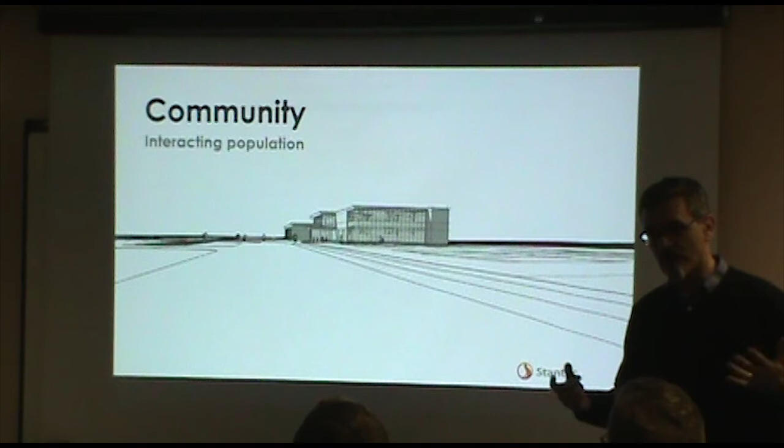This is a preview of what we're proposing to share with the community at a larger open house session, so we definitely want your feedback and input. The dictionary defines community as an interacting population of various kinds of people with a common purpose in a common place. Looking at that definition, it kept coming back to what we kept hearing from all the input, from the surveys, from the committees, from everything we researched about what this really needs to be about. So with that, I'm going to walk you through the conceptual design for a proposed new Berkley Community Center.

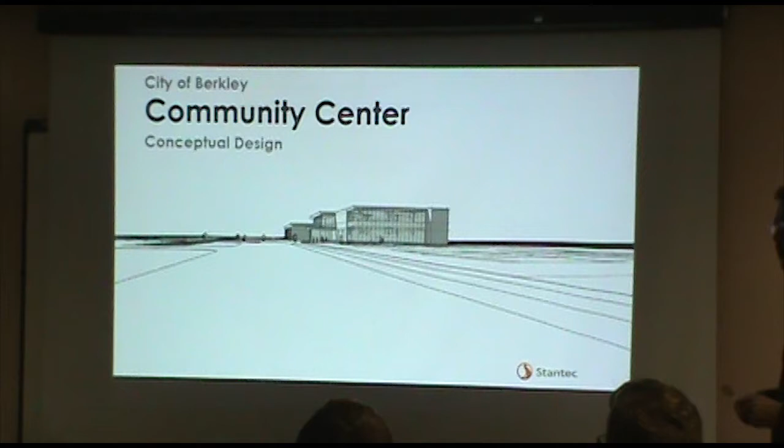If you think you're going to see the cool new pictures right up front, you're going to have to wait a minute for that. We're going to walk through a basic agenda talking about the conversations and research that got us to where we are, the vision for what this space could be, and then end with the components of what we're proposing it will make up.

Starting with Parks and Rec, kind of where they are today—a lot of you know this information. I'm not going to read from the slides, but we wanted to give you a picture of what we currently do in our facility. We think it's good, we think it's not great—we have some facility limitations.

One of the things we saw as we were going through here, looking at pictures and at what we do, is how many things we can do for youth, but how limited we are to do things for teenagers, adults, and even seniors. Currently there's a list of a lot of the classes we offer, and one of the things we hear all the time when people come in is, 'Oh, I didn't know you do all of this,' and 'I didn't know you could do this.'

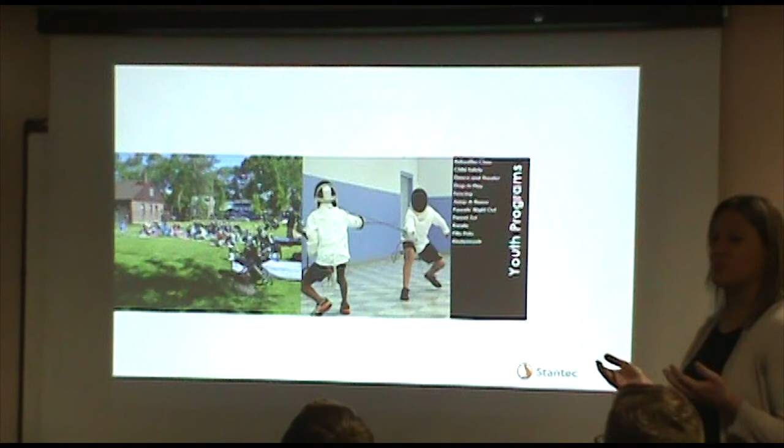We have nearly 12 special events throughout the year. We run with 5 full-time staff, and we do over 30 youth programs, a number of senior events, programs, lunches, outings. We had a group of 20 seniors just go see A Christmas Carol yesterday. We run a transportation program. We run specialty camps. This year we had over 350 different kids come through our summer day camp—349 actually, but 350 sounds like a better number. We maxed out at about 180 on some days, and averaged 165 on others. But the place they were located was the ice arena, and we're limited with what we're able to do there.

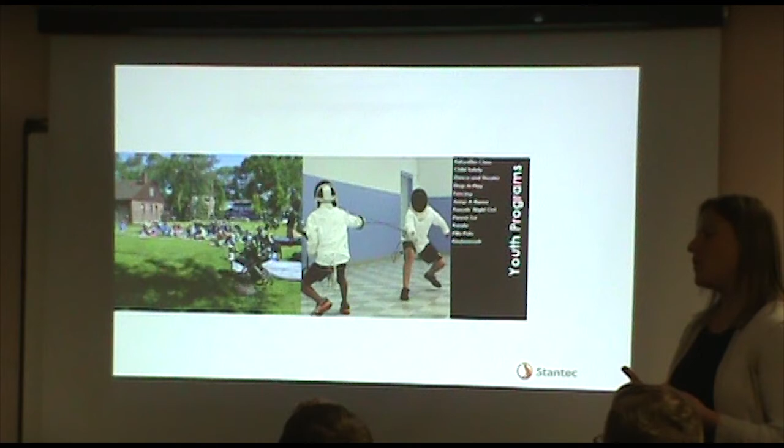We're limited with what we can do in terms of ages because of the facility. But our facility is used, opened, and operated over 300 days throughout the year. It's used during the day, and we have multiple birthday parties on the weekend and evenings. I can't stress enough how good I think our staff does with what we have. We just feel that it can be great, and that now is the time to do that.

I remember the first time I got a chance to meet the entire staff of Parks and Rec, and I kept waiting for the rest of the staff to come in, especially with the list of everything they've been doing. So to have this group be able to do that, it's pretty amazing.

So we did research on really what's driving this need. For those of you who saw the earlier report delivered to the CAC several months ago, that contained a lot of this information.

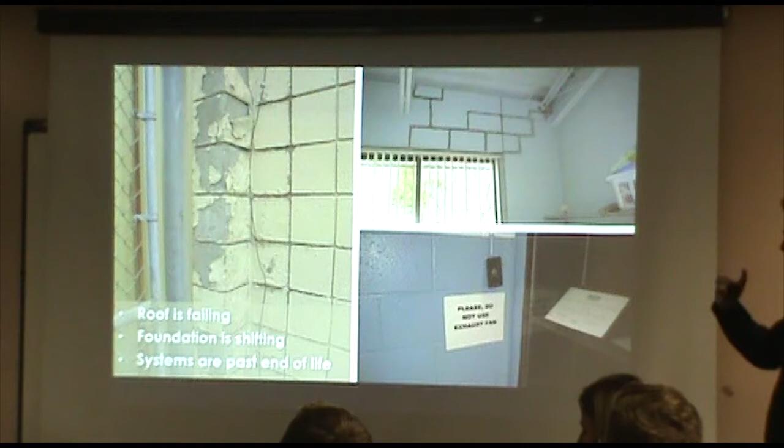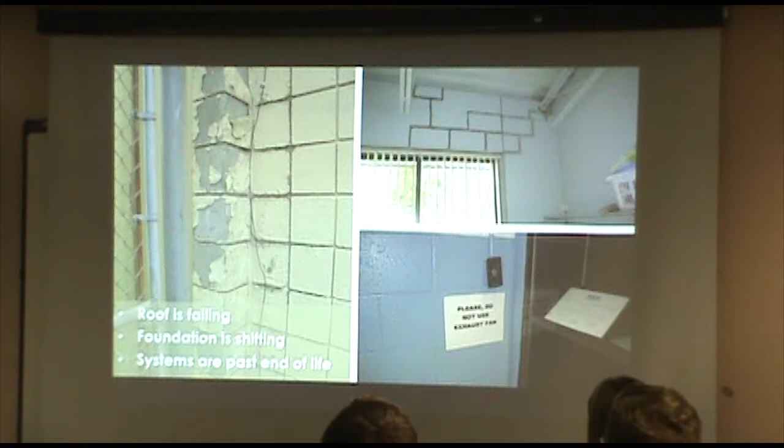The first piece is really these buildings have been used, and they are at the end of a lot of their components—a lot of the pieces are at the end of their useful service life. There are some challenges beyond that. The roof system on both parts of the building is at the end of its life, in some cases past. There's foundation shifting causing the community center building to actually sink and move—things that are not easily repaired. And the heating, cooling, ventilation, lighting—all of these things, depending on which building you're in, date from the early 1970s all the way up through the late 1970s. Coming from that same rough era myself, things start to wear out when they get over 45 years old.

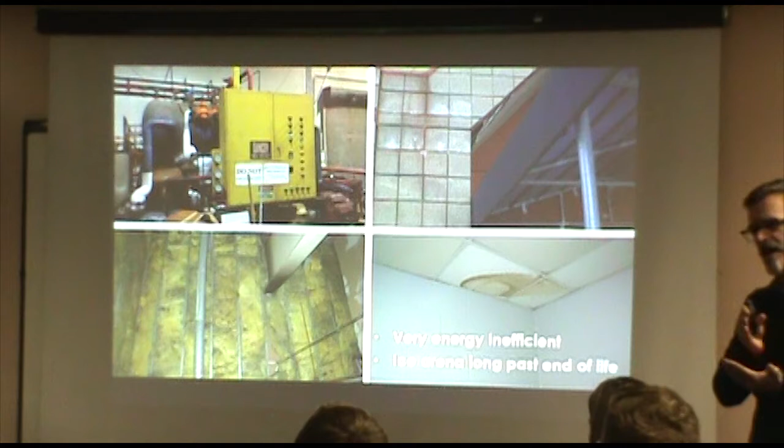The buildings are not very energy efficient, and the ice arena is long past the end of its life. For an ice arena of that type and era, it ran a lot longer than one would be able to expect.

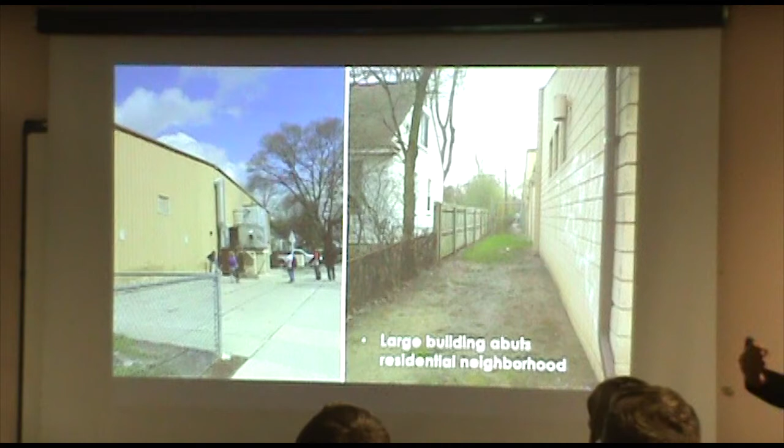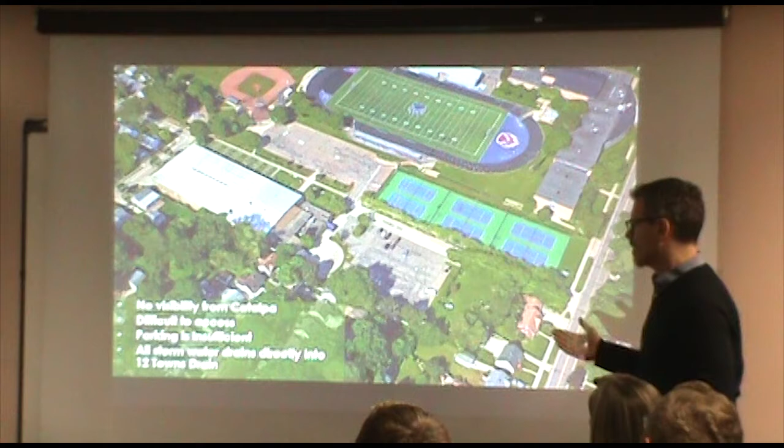Some of the other challenges we see are—it's a very large building and it immediately abuts a residential neighborhood with nary 10 feet between the two. So it really doesn't present a good front for what's going on when it backs up to a bunch of houses like that. When you look at the overall view, there's no visibility of the community center at all from Catalpa. It's difficult to access, and parking is insufficient, especially if there's activities going on and people are driving through and crossing drive lanes.

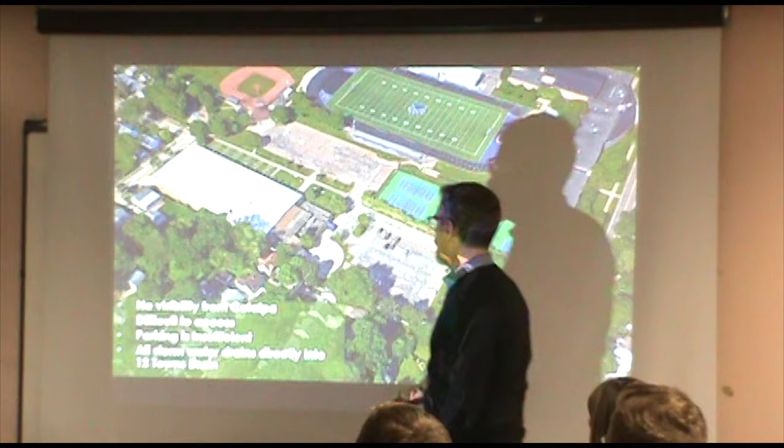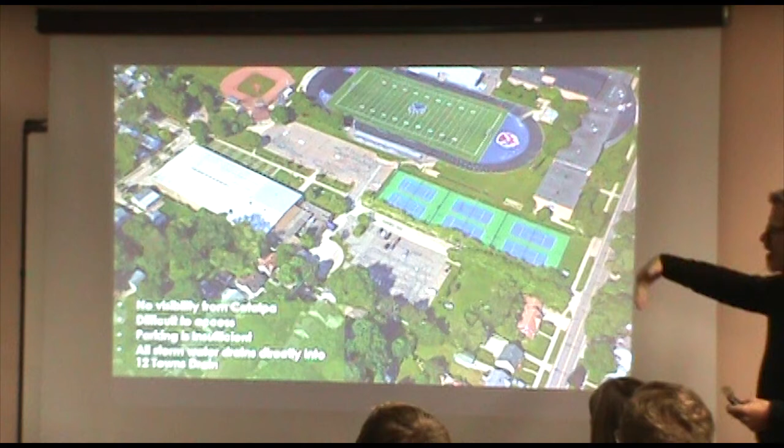The way it was originally designed—for those who don't know—the 12 Towns drain, a 7-foot diameter storm drain, runs right down Robina and hooks up to another one that goes down Oxford. It's about 20 feet down, which makes it very difficult to work with the site because you can't build on top of it. But all the parking lots drain without any detention directly into that, creating an issue with a lot of impervious surface draining directly into the 12 Towns drain every time there's a good rainstorm.

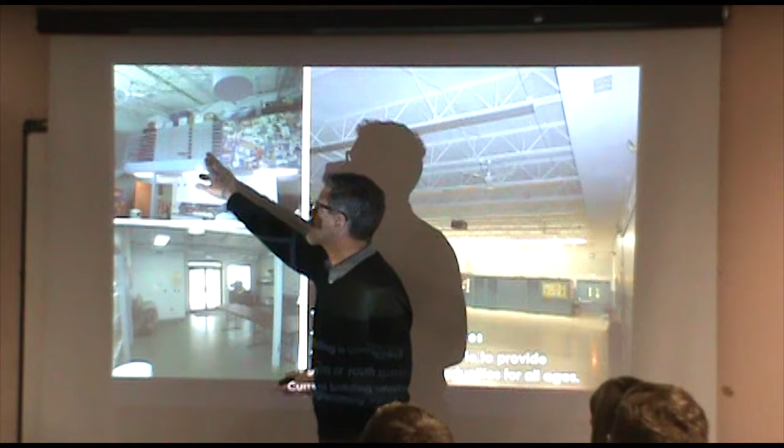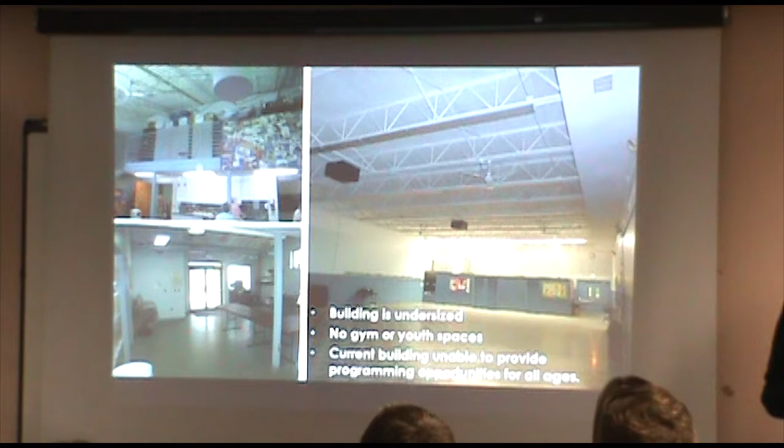When we get into the building—and this isn't even looking at the ice arena—the building is undersized. You can tell by the challenges of storage for everything being kept in there, furniture being stored out in the middle of active use space. The gymnasium, such as it is, is actually too low to be used as a gym, and too small, which really leads to the issue: the current building is unable to provide programming opportunities for all ages. It works well for some, but not really across the spectrum.

And as part of this, there was outreach in many levels over many years. I actually turn that back over to you. So we'll talk a little bit about these.

Obviously, the Recreation Advisory Board has been talking about a new community center and the needs of a new community center for over a decade. They started working on it probably early 2000s. Then it came to a vote in 2009, which we'll discuss, and moved to now.

The Citizens Advisory Committee studied all of the issues. They walked through the facilities, and their recommendation was that the community needed a new community center, void of a pool and an arena, but a new, up-to-date, energy-efficient center with 2 gyms. They looked at the survey, listened to the information, and looked at what other communities are doing as well.

We asked people what they wanted to see in the community survey, and that all went into designing what Stantec has designed at this point.

Research of similar facilities: between staff and I, we've been in over 15 different community centers in Michigan. I've been in 12 over the past 2 years, talking to people. We've talked on the phone about what works, about the best ways to make revenue, because that's something we have to think about, and what really makes sense and what facilities really will be used and have a right-sized facility.

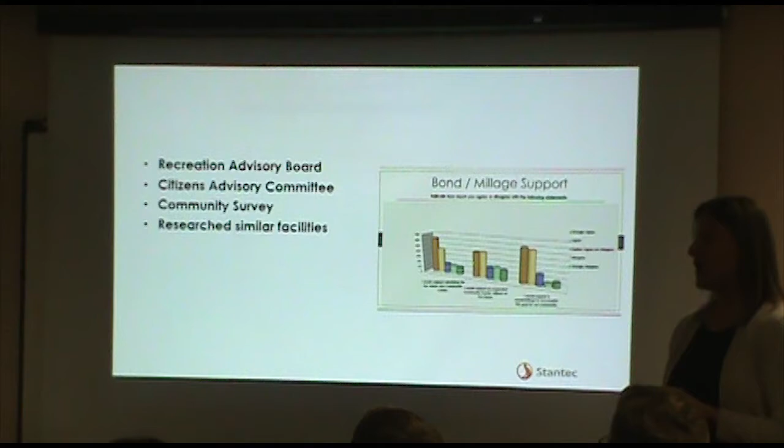When you're looking at some of these bigger communities, we don't need something the size of Canton or Livonia, but we've run the gamut on the community centers we've talked to. And then obviously our 5-year plan.

I'll repeat a story I've said often: during our 5-year plan, we had multiple community meetings and people came to tell us what they want to see in their community. I remember a gentleman sitting at a table who said, well, I don't want to say what I really think about your center because I like you guys, and his children do things in our building. And I said, no, please tell me.

And he said, well, I feel like when I walk in this community center, it feels like The Walking Dead.

The truth of the matter is that he wasn't saying we don't do a good job. This isn't our home, but in a way it is—it's our home away from home, and we love what we do and the people we service. But everything that came from the master plan and the conversations about the community center was, we'd like to see a gym, we'd like to see these different elements that we just don't have now.

So I think we really used all of these different outreach and research efforts to come up with a good plan. We also have daily conversations—all of our staff has daily conversations with people who use our community center now. Those are people who already use what we have and can tell us what they'd like to see in a new center. I think that's really important too, and we've been doing that for years.

So from all that research, from that input, from just spending time over the years in the facility, one of the things we were tasked to do was help define a vision for this project—not a vision for Parks and Rec, but a vision for a new community center, a new space for the community. It came down to a handful of what we call success factors, things that complete the sentence: for this project to be considered a success, it must. The things that really have to happen, both

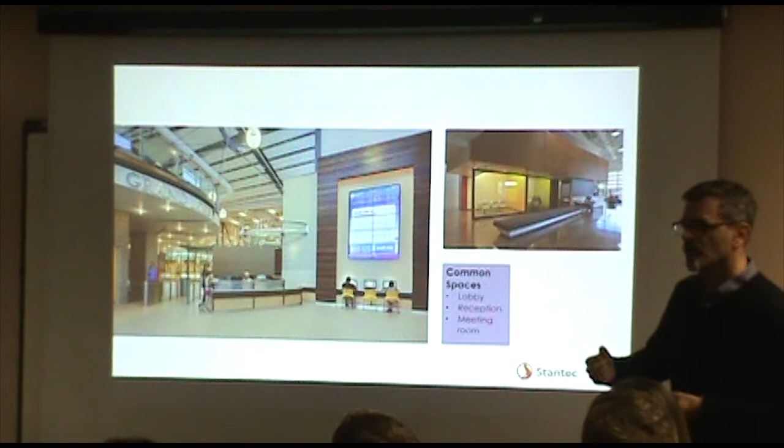But again, the idea that a welcome desk, a reception desk, is easily visible the minute you arrive, you've got a sense of welcome, but also has the ability for when a teen program's going on at the same time as a preschool or after-school program, that you can keep an eye on what's going on as those two groups are in the building at the same time.

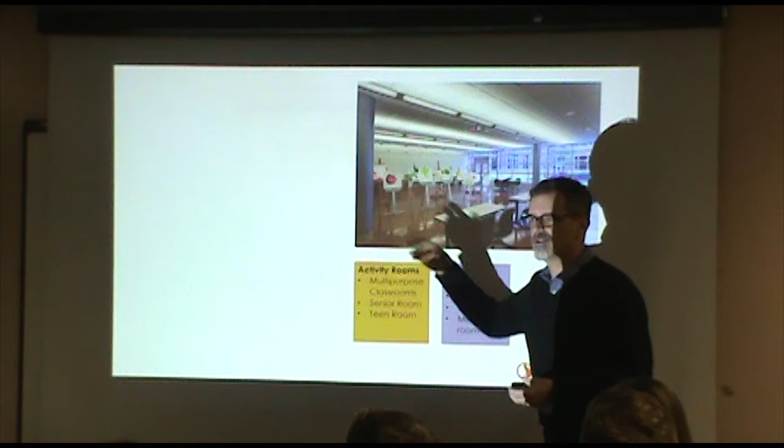Next is the activity rooms, really the heart of this. Multi-purpose classrooms, ones that can serve meetings, events, art programs, after-school programs, with ample storage to put things away, to shift the room use throughout the day. Large enough to hold groups of 20 to 30 people depending on how you lay it out.

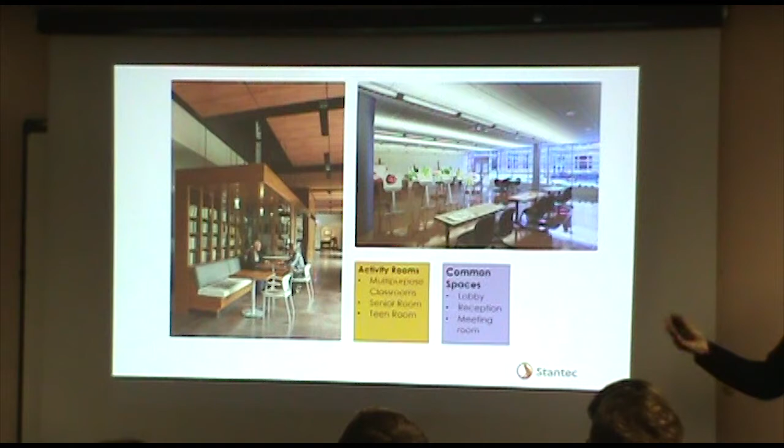In addition, providing dedicated space for a senior room and dedicated space for a teen room. Our goal here again is to create a sense of identity, but also create a sense of common purpose between all these different functions. The big piece, recreation community space.

This really gets to the flexibility of the building. To move to a true multi-purpose two-court gymnasium, something that is a single court, full-size basketball that can be, with the drop of a divider, split into two activities so you have the ability for two simultaneous uses. That can also serve as a banquet facility for up to 250 at tables. So it's a good sized space with the adequate support to make it work.

An elevated indoor walking and jogging track, as well as a small fitness center for both exercise equipment but also for exercise classes, and then a dance studio.

Volleyball seems to own the height, and if you hit things on the ceiling, it doesn't work so well. But again, fitness, wellness facility, and then a multi-purpose space that can be used as a dance studio and other activities.

Staff offices, to make sure there's a central place near that reception desk with the ability to monitor what's going on and the ability to work together as a group. Really looking at this as the heart of the building.

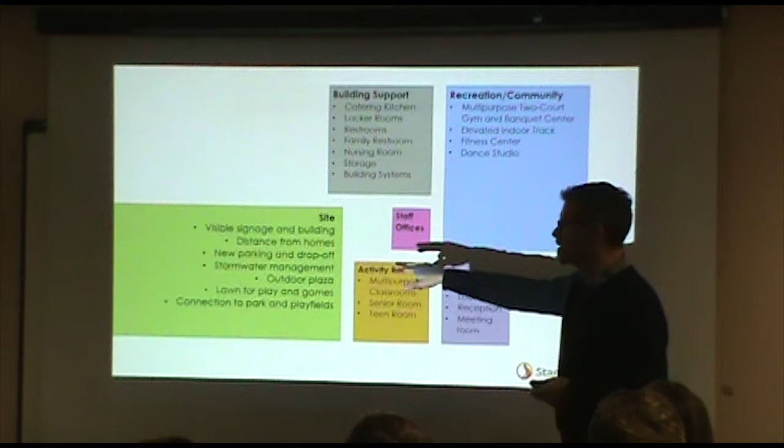What makes this project really interesting is that how it works on the site will make a big difference to the success of the whole thing. So we set a goal of making sure there was visible signage so people see it's there, but also the building is visible. So if you're on Catalpa, you can see it.

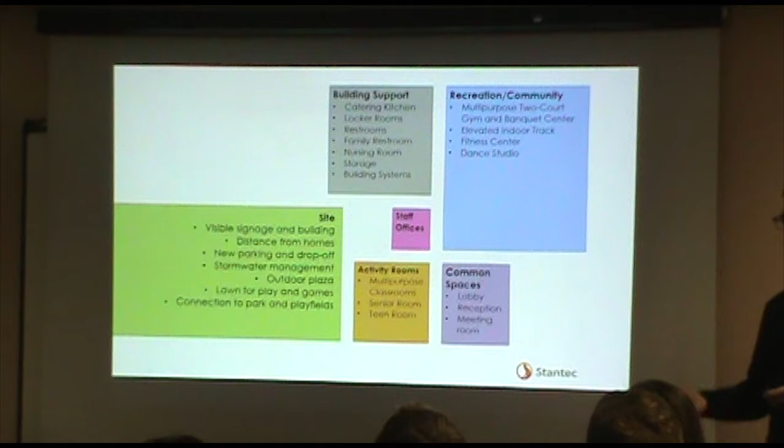That would provide some distance from the homes, so it's not backing right up to that space. There's new parking, an appropriate drop-off area, we're managing stormwater at the same time, and taking advantage of the fact that there's land we can't build on because of the drain, to create outdoor plaza space, a community lawn for outdoor play, outdoor games, for picnics, those sorts of things.

And then really taking advantage of the fact that there's the park, the ball fields, sidewalks, Hurley Field, and really using this building to take a bunch of somewhat disconnected activities and let this act as that hub.

So the result of this, as we've worked through the design, is approximately 38,000 square feet, similar in size to the complete area of the current space. In order to fit on the site and work around that 12 Towns drain, there are parts of the building that are a 2-story building, really minimizing that footprint.

Fully ADA accessible, both levels. It's a requirement, and we want to make sure it's more than just there, that it works, and works in a welcoming way. That it's secure for after-school programs, so that controllability is important. That it's energy efficient, meets all modern building codes and energy codes, which have just changed and become even more important to hit. That it has views to the outdoors and is visible from Catalpa.

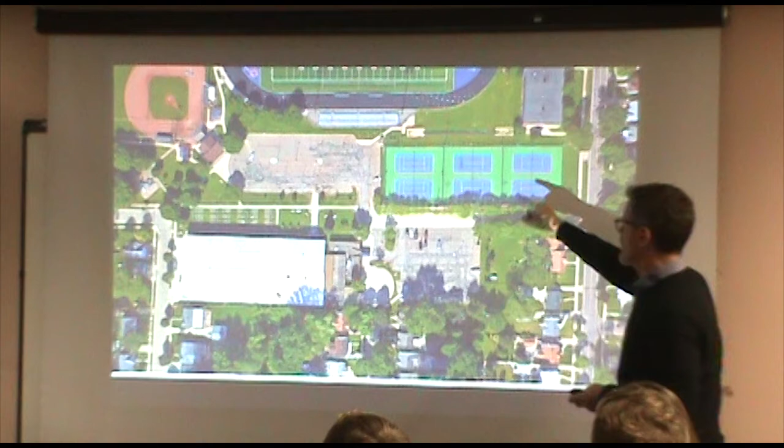Just so you've got a perspective of where things are now: Senior Center, Community Center, Arena, old Studio Ice, Main Ice. Here's Robina with the 12 Towns drain that runs right down the middle of everything. And then the tennis courts and the 2 parking lots.

As I mentioned, the proposal is to build the new Berkley Community Center on the west side of Robina. The tennis courts remain, which was an important thing to do here. And the goal is to take it from being really a hidden piece to really a visible amenity that acts as sort of the hub to all these activities, from the park all the way over to the tennis courts.

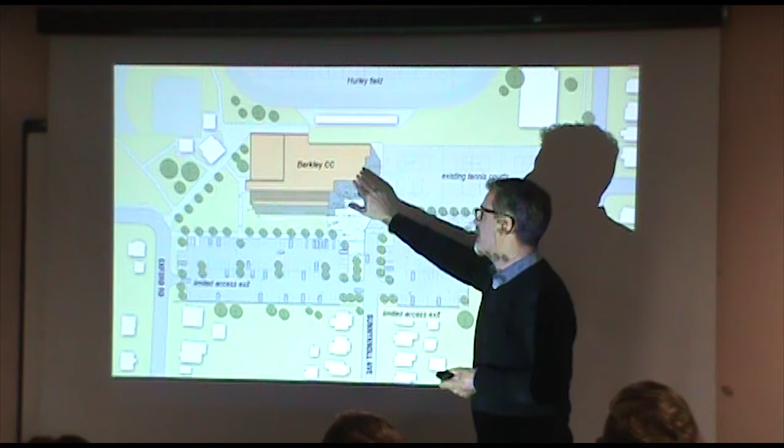As one drives down Robina, or drives even down Catalpa, and I've driven this a lot in the evening when the tennis court is lit, you would be able to see the building at the back of the tennis court. The idea is it's very open on the end to allow visibility of what's going on.

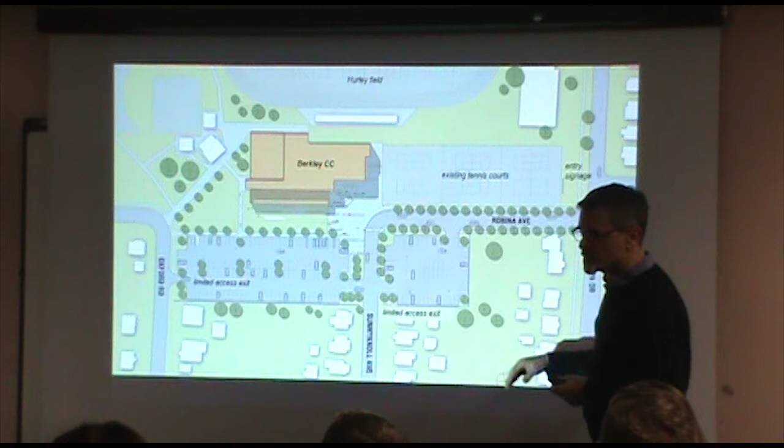A single layout parking lot rather than the split. The benefit of this rearrangement is it will allow you, for outdoor activities, to close off one lot, close off the other lot, or close off both lots without that road that runs kind of between the two right now.

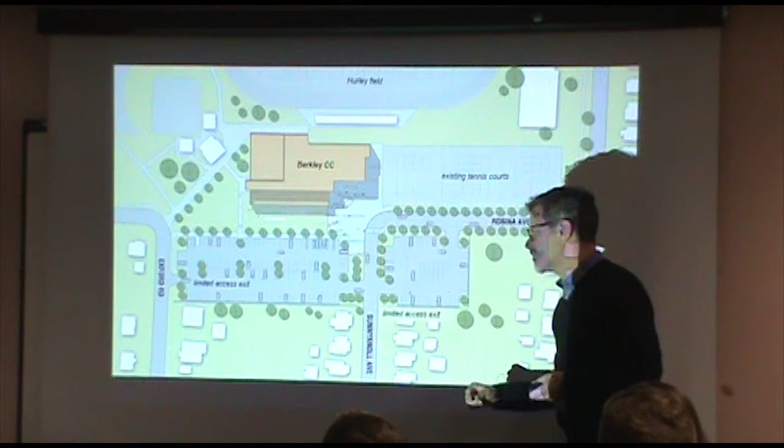The plan is the main access, entry and exit is still Robina off of Catalpa. In order to handle any kind of emergencies or to handle the crush of vehicles that every Friday during football season, there's the ability for limited access exits, gated controlled exits that can be typically left shut but open for certain events at the end of Sunny Knoll and then back out onto Oxford where the ice equipment currently is.

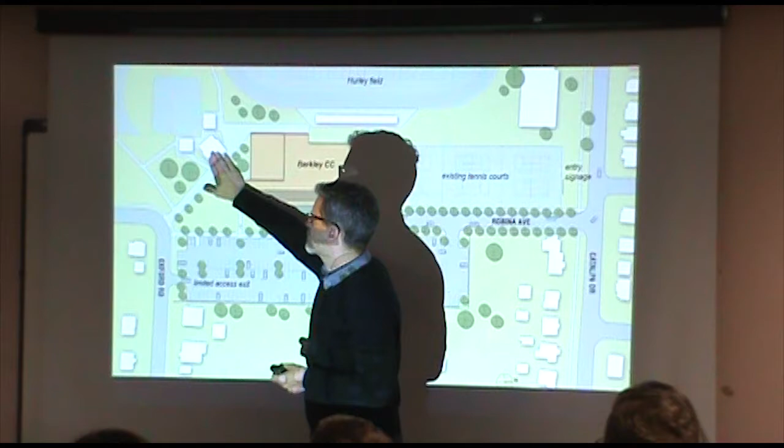One of the neat things is we really think this will work well for things like Berkley Days, for other outdoor events. It makes the community center more of a part of that, and it also allows just for easier control of that parking lot.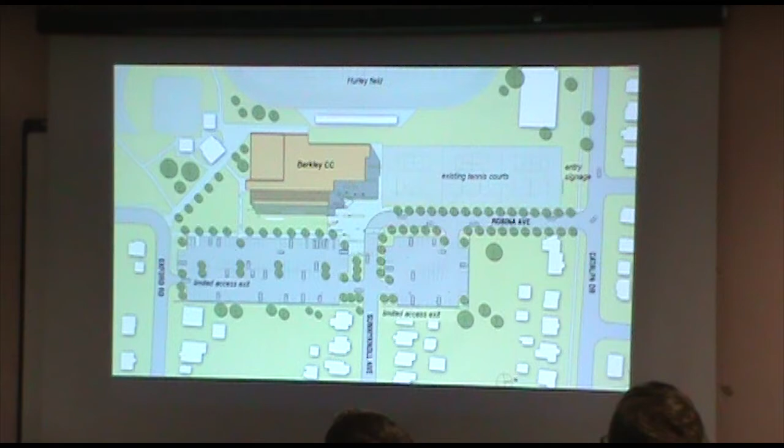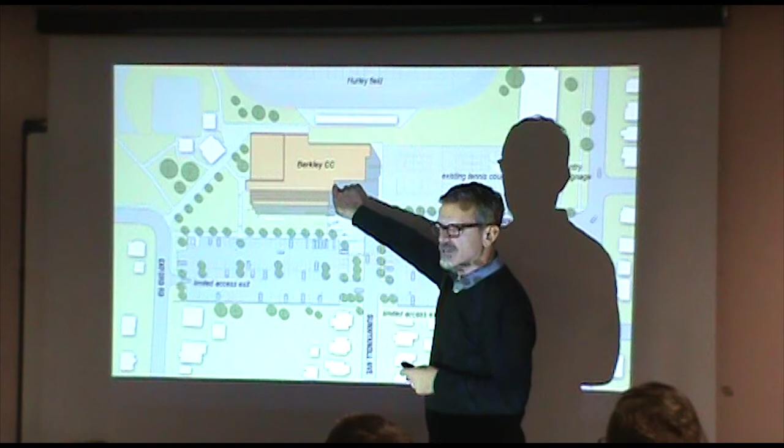Kind of zooming into the building, so if you're coming and you park or you're getting dropped off here at the entry, walking across this entry plaza, this is the north entry, the main entry, and this is the secondary entry here off the south that connect in on the inside.

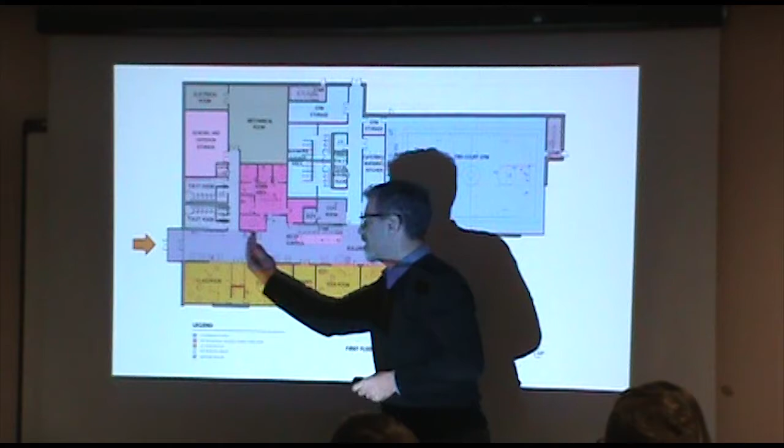So coming in, and I'll read these out because it's a little hard to read the words here, you're seeing the arrows pointing into the 2 entries. This purple area here is the proposed building commons, that's a kind of common community space.

I'm going to use this rather than standing in front of the picture anymore. The idea is you come in and the first thing you see right in the center of this whole thing is a reception control desk, a welcome desk where you check out equipment, and again, the eyes on the whole community center to keep an eye on things. We've intentionally designed it with a lot of windows from that common space into the conference room, into the senior room, into the teen room, into these 2 classroom spaces.

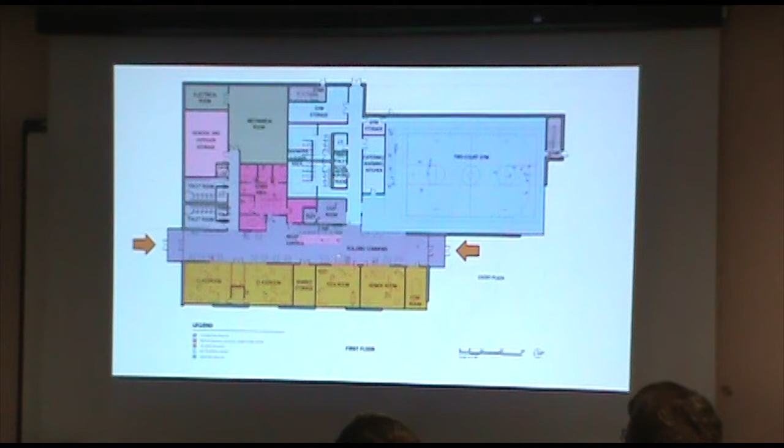So there's good visual control. Different activities can occur at the same time, but also a view into the corner of the gymnasium, not just for control, but for the ability to show off the activity going on inside the building. As I said before, in the evening when there's volleyball or basketball leagues going on, the ability to see what's going on as you come down Robina or as you're driving past on Catalpa. We've even left a little area here where a half-court tennis court can be set up for practice.

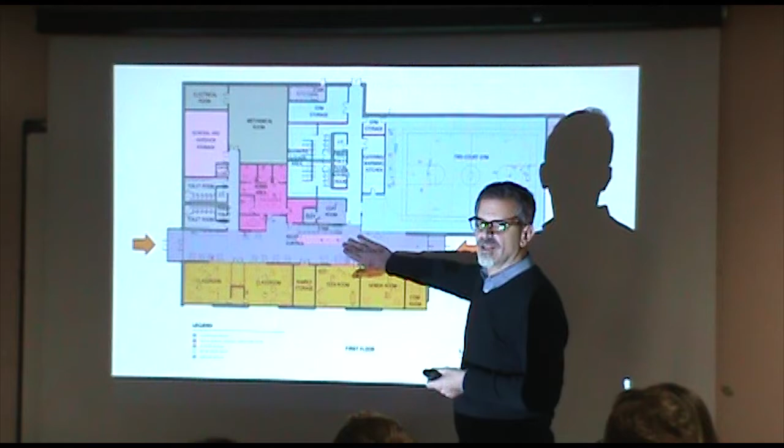Once you've arrived and checked in, you said, like basketball, we're going to go shoot some hoops. You head west down this corridor, toilet rooms and shower locker area to support the activities in the gym, a family toilet room and a nursing room right there as well. The beauty of this is that parents can come in and do one activity and there's good visibility for seeing what their kids are doing elsewhere in the building.

Go right into the gym. It can either be a single court gym or curtain drop down. The plan is for bleachers so parents can watch the activities going on in the space. There is ample gym storage to support this, whether it's being used as a gym or being used for banquet use. Catering, warming kitchen, storage area here as well.

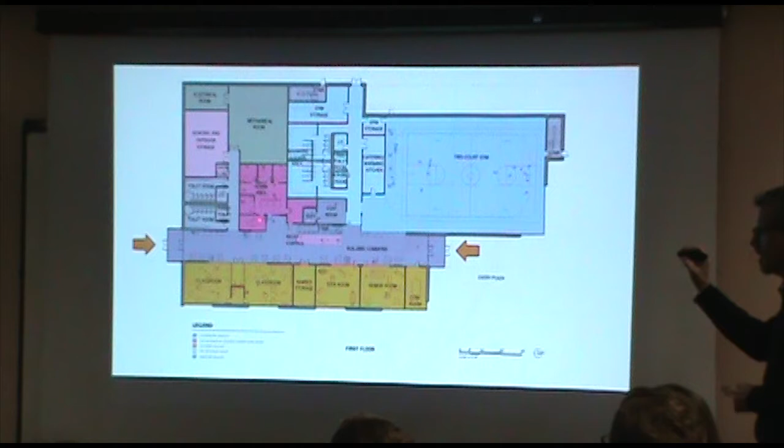Once you get out of this core support area, coming back down here, the admin, support staff area, offices, meeting space, workspace, and storage right off that reception control center, so it's really easy to monitor what's going on in the whole building. Ample general and outdoor storage to support activities out on the lawn.

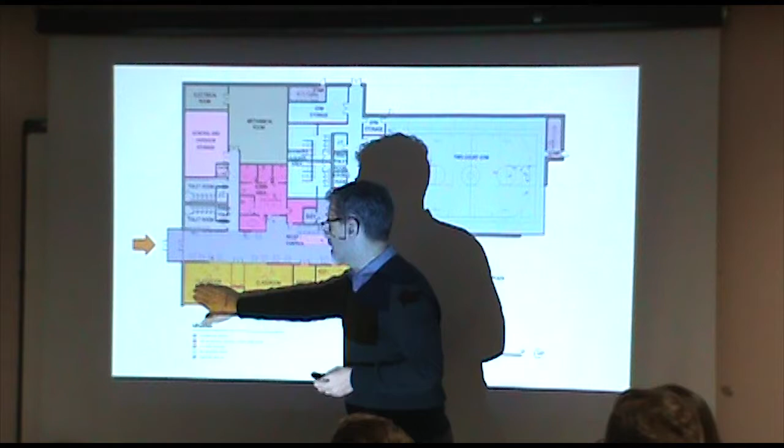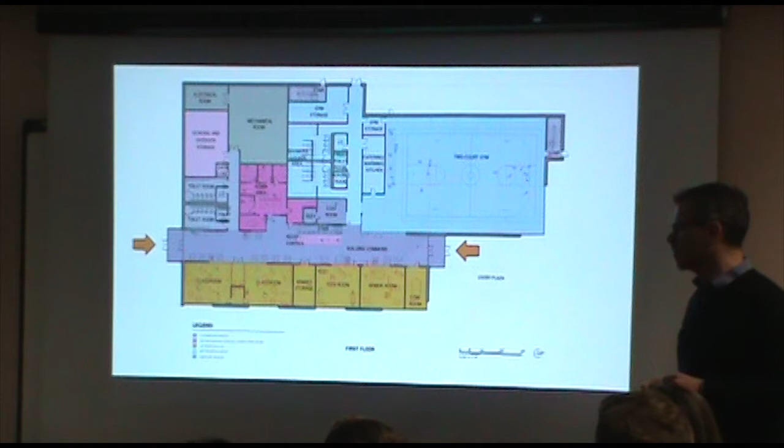And then coming back here again, two classrooms that can be used for after-school programs, for art programs, senior programs, whatever activities. We've put in a single-person toilet room between the two to allow those programs to use that space without having kids wandering around the building. Again, shared storage to support all of this.

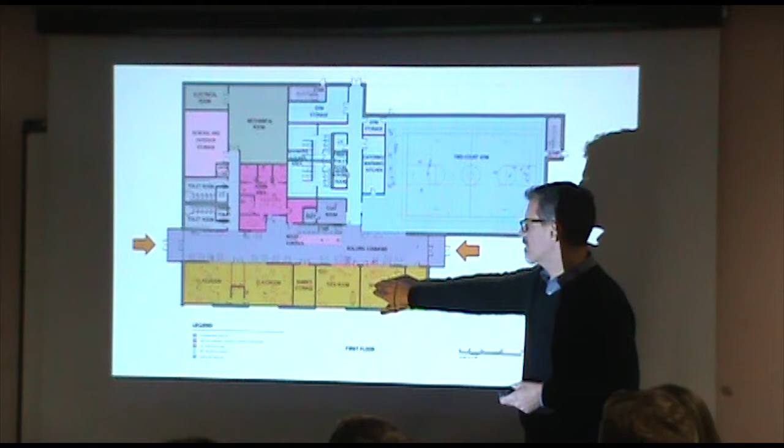And the hope here is that the teen room and the senior room will be able to extend their activities out into this common space. This doesn't want to be just a corridor. This really wants to be part of the activities.

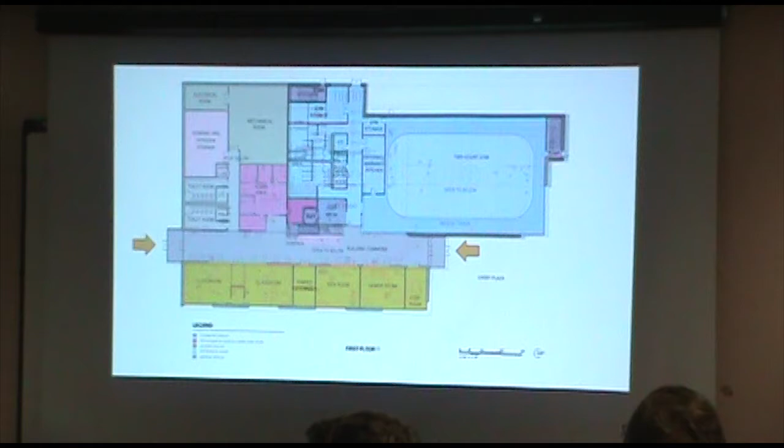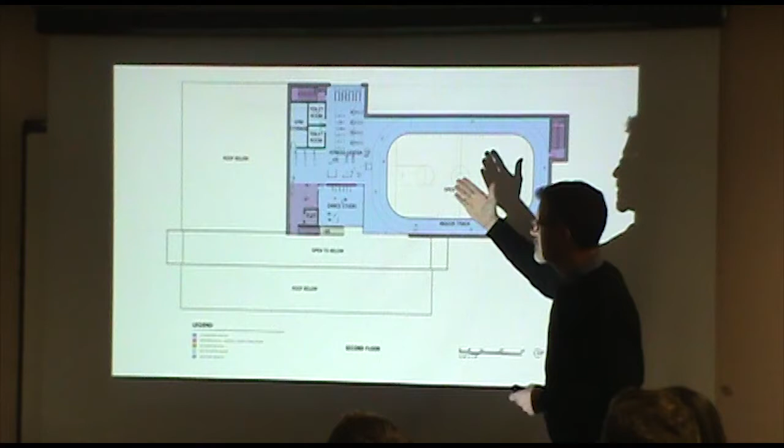If you're here for jogging or for the fitness center, there'll be stairs and an elevator right behind that reception desk where you can head right up to the second level. On that second level, you'll arrive in a little lobby area with the dance studio immediately off of it. And the neat thing about both the dance studio and the indoor track, a two-lane indoor walking jogging track, is both of these will have windows that open into that common space.

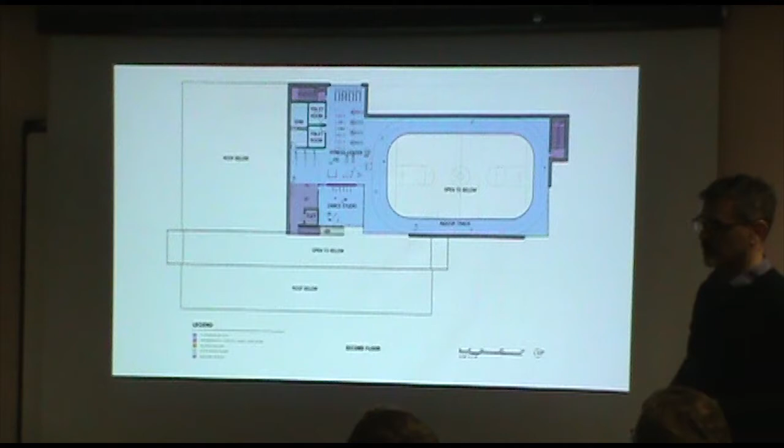So again, you're showcasing the activities going on. Moving beyond that, a fitness center area, a mix of equipment, but also open floor space for different activities, with restrooms up there as well. Right now, we've even got a window in so you could watch the activities going on at Hurley Field from the building. You'll be up high enough to see right over those bleachers, heckle the visitors when they're in town. And again, an indoor track area that feeds right off of that fitness center area.

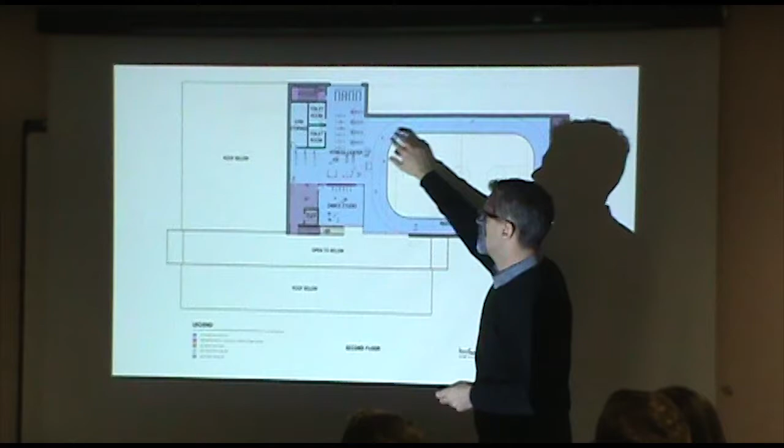We love this stuff, and this is way past pen and paper.

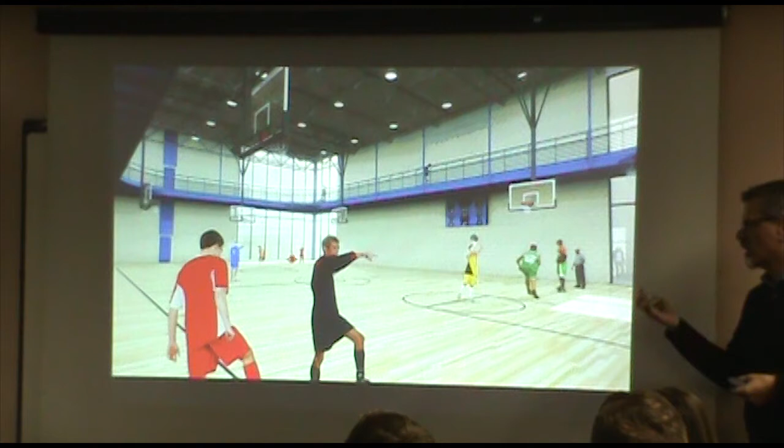This is actually that space rendered. So this is the two-court gymnasium. You've got the elevated walking jogging track up here. Again, this space is large enough to support multiple volleyball games at the same time, basketball games going at the same time, with a view directly into the lobby space, but also that view toward the tennis courts in Talbot. The nets can be swung up, tables can be moved in. This becomes a great banquet space, a great indoor activity space.

Coming around outside into that common space, an opportunity to really showcase all the community programs. This is right at the main entry as you come in. Looking down this direction, you can see that reception desk right here. So that, again, is a great point of welcome whether you're coming from the parking or you're walking over from the park.

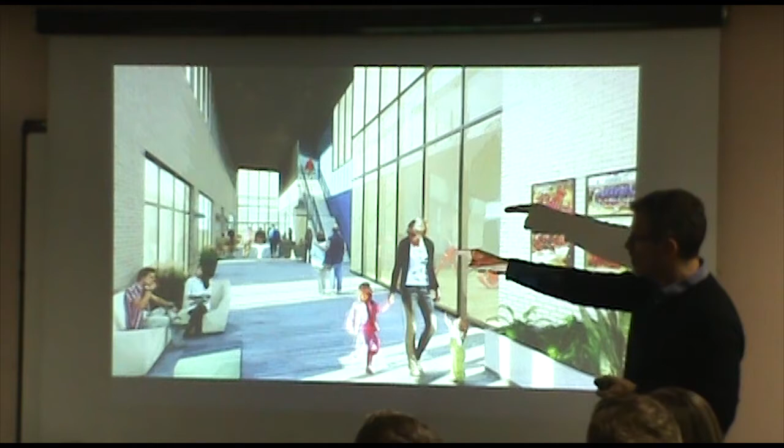Views, bringing daylight into this space, views into each of those classrooms over here, each of these spaces. And then a clear path going up to that second level for all those activities up there.

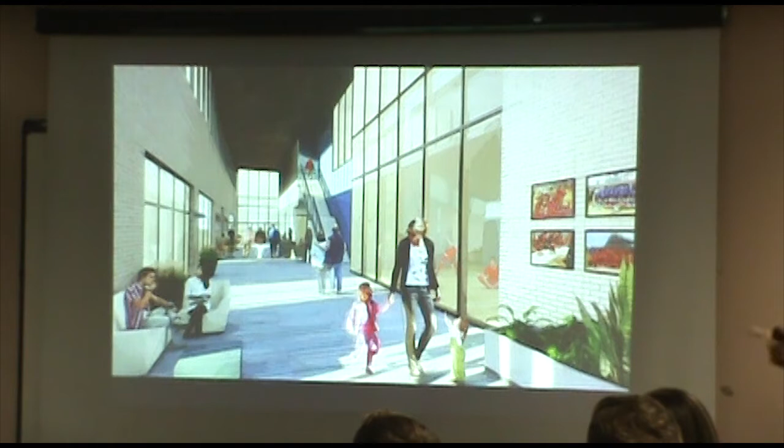Again, the hope here is that this is as much of the experience as all the rooms it supports.

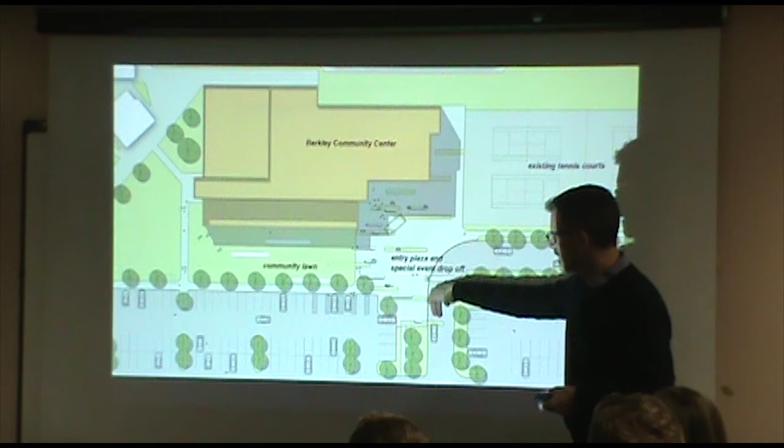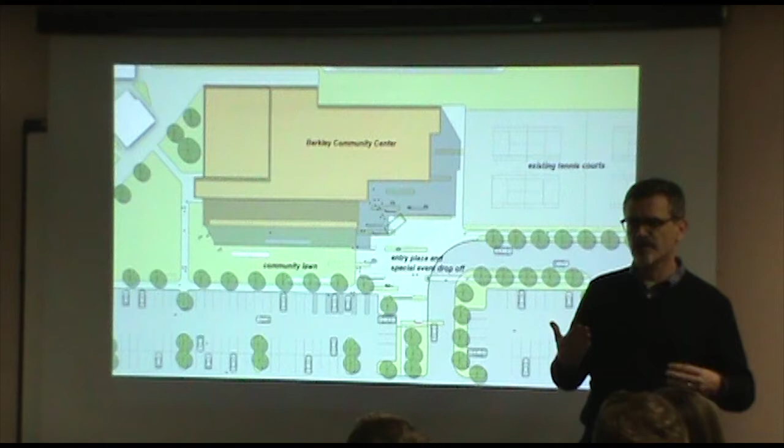Zooming in closer, one of the neat features we're looking at is this entry plaza special event drop-off area. Normal drop-off would be right out here, where Robina bends south to line up with Sunny Knoll. But for special events, for the senior bus, for different activities, the idea is that this is pedestrian paving, but designed to be drivable. So if there's a bus that needs to do pickup or drop-off, there's limited access to pull up and get very close to the building. These little rectangles here are proposed benches that act as protection so nobody can accidentally drive up and hit the building.

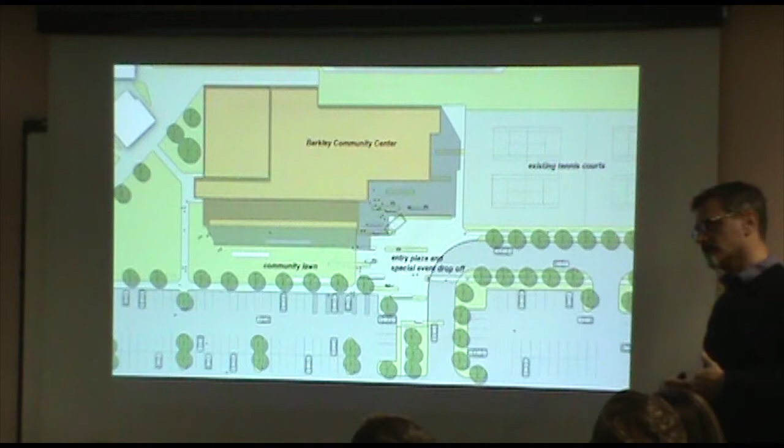Out here in front, a large community lawn space for bocce, lawn bowling, picnicking, whatever outdoor activities you want, that connects over into the larger park area. One of the neat things about this plaza space is the ability to just put furniture out here, and have people come here for lunch, and also use it for outdoor activities. Our hope is that if you've got something major going on inside, like Taste of Berkley, you could spill that right outside and really use this as the community center, not just that room.

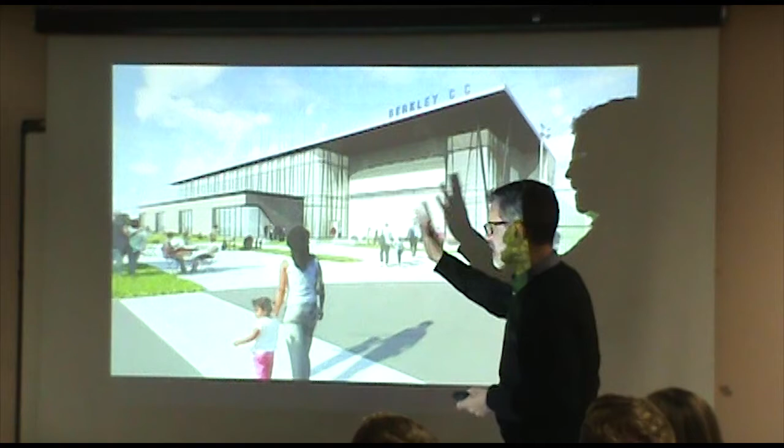And onto my favorite image of this whole thing. This is what it would look like upon arrival. You show up, you get dropped off, you park, you come up here, there's community activity, there are events, outdoor games going on all throughout the day. A view into the activities, you can see both into the gym and up to the running track, into that common space. The opportunity to really showcase what makes the community unique.

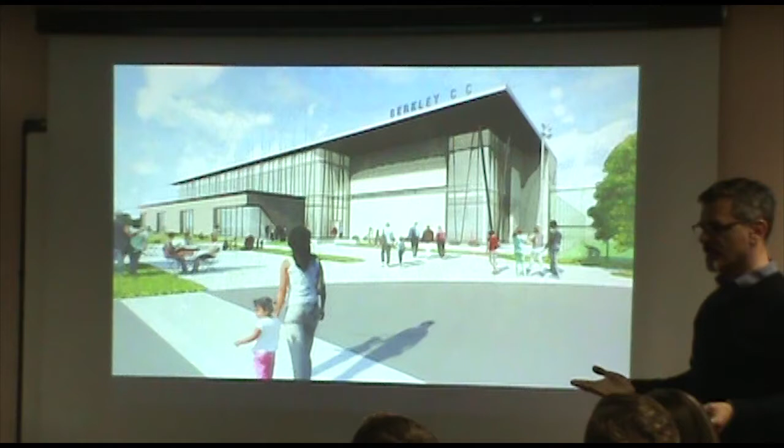And my favorite little freebie we discovered as we were working through this: as the sun sets in the west behind the building, this wall is going to get dark early. Set up chairs out here, people bring lawn chairs, blankets, whatever, and have outdoor movies projected right onto the building. It's something that's no extra cost. It was like, that's a really neat opportunity to take advantage of what would normally be a large blank wall.

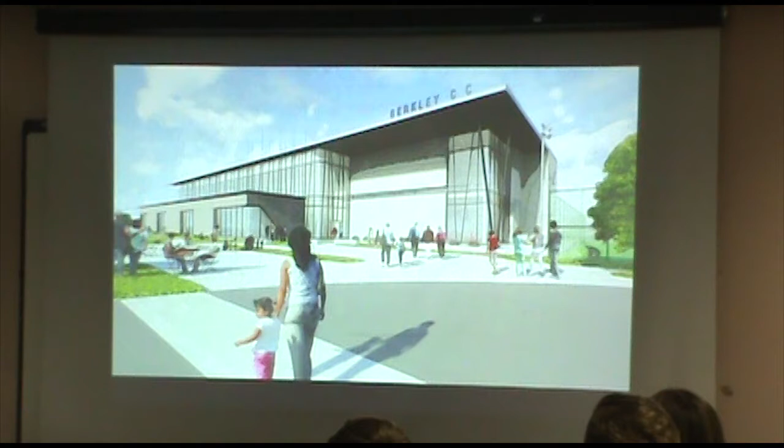This is what we're proposing to share with the community, and it really comes down to these 5 key elements: it has to be for all of Berkley, it has to be for multiple activities, it has to be for thriving programs, to take what works now and make it better, and take the stuff you haven't even dreamt of yet and make it possible. It's got to be visible, open that building up, open the excitement of what's going on to share it. And it has to be for the future. This has got to be something that's going to serve Berkley long past any of the time that we're here.

So with that, thoughts, comments, questions, rose petals, accolades, good choice.

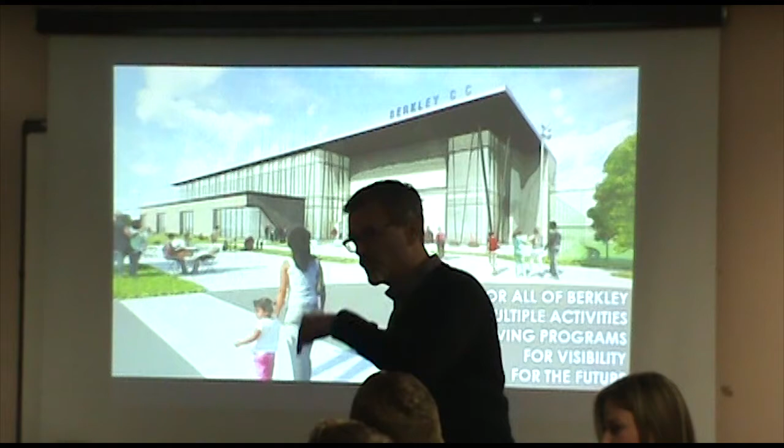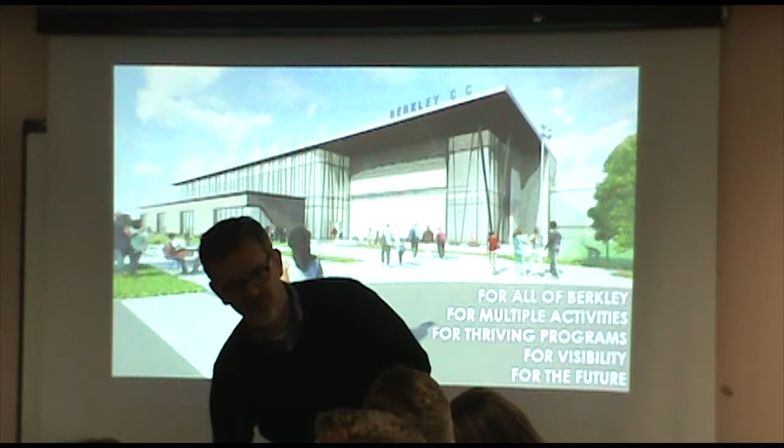A couple of questions. Will the tennis courts remain? Yes, we had a couple proposals that reduced them, but no, if we touch them we lose our state funding. We did the grant, yeah. Right, the half-court tennis wall? Yeah. The other question is the signage.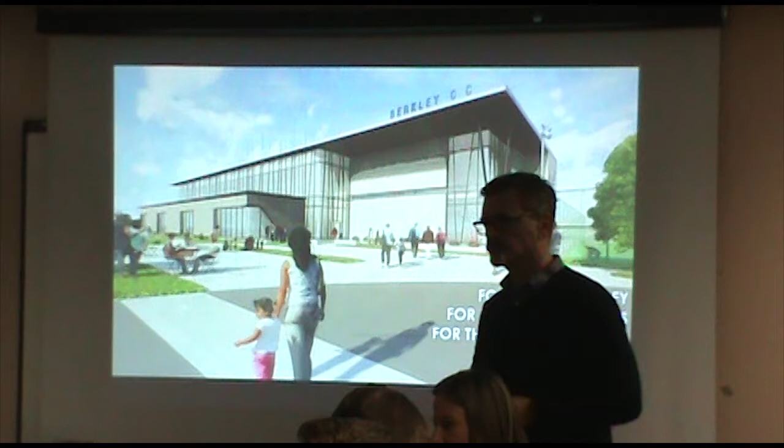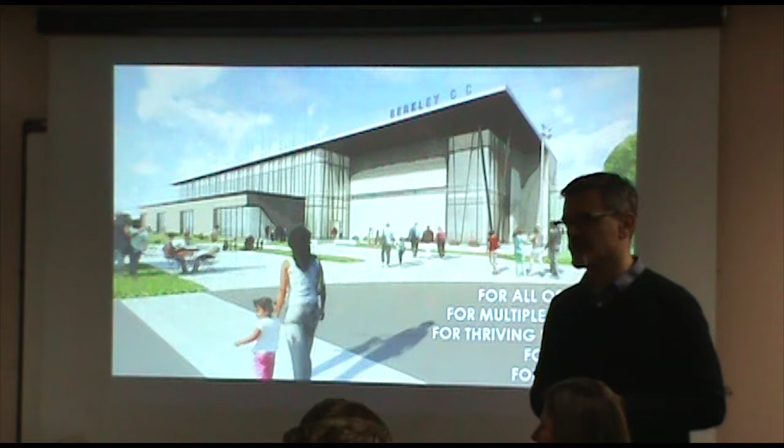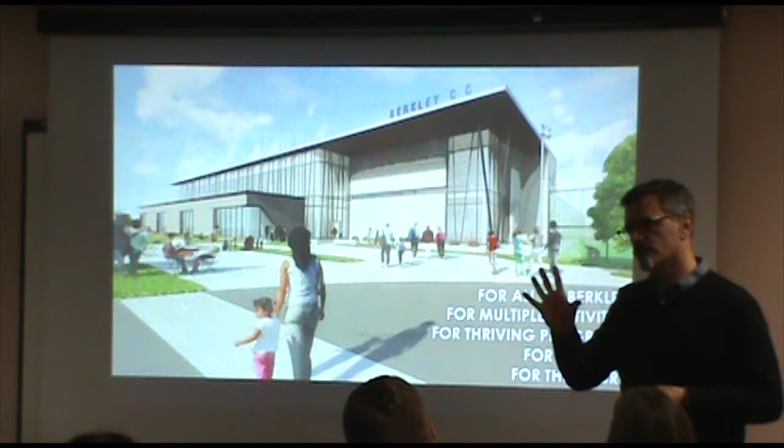It is going to be visible. Will it in any way interfere or bother the neighborhood? The answer, I would say, is we're going to have to make it so it doesn't. We've got to take into account that Catalpa is not just a secondary street, it's also a residential street. But there's, and I wish I had the picture, one of the things our lead designer proposed as a neat idea, and I don't have the photograph he used as an example, it would be to possibly have a planted wall, like ivy, with the sign built into that.

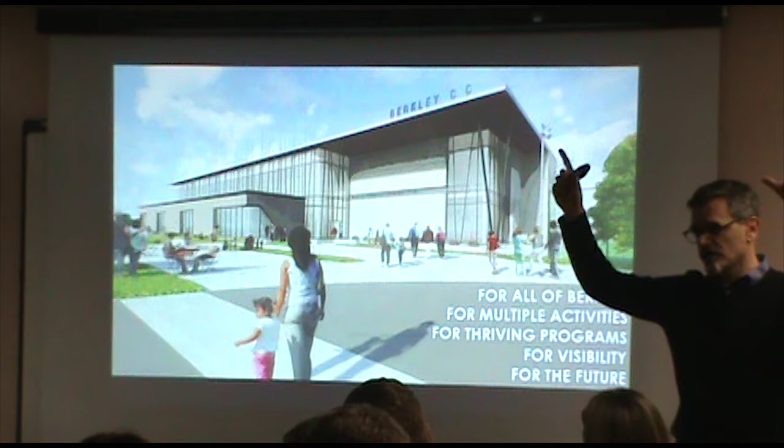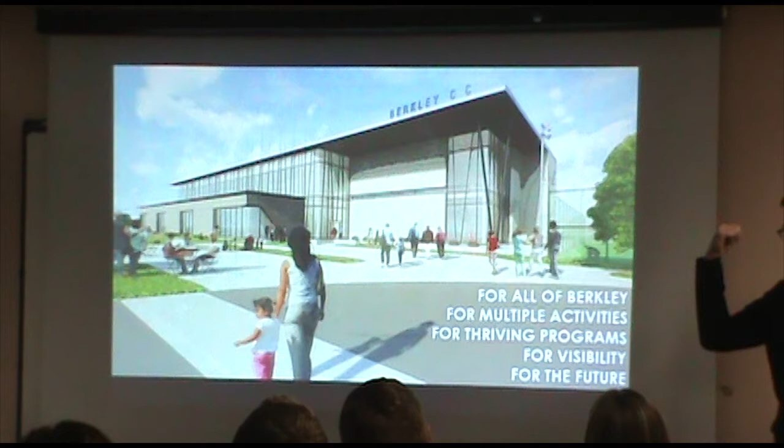It would be lower, and it could actually be part of the front of the tennis courts. But you've got a great front space out there. I drive by, you don't think of that front lawn doing a whole lot. It's got that one sign in it, and it doesn't really do a whole lot beyond that. There's an opportunity to make that part of the welcoming, especially at the end of that. Do it sometime in the evening when it's not freezing cold, drive down Catalpa when the tennis courts are lit.

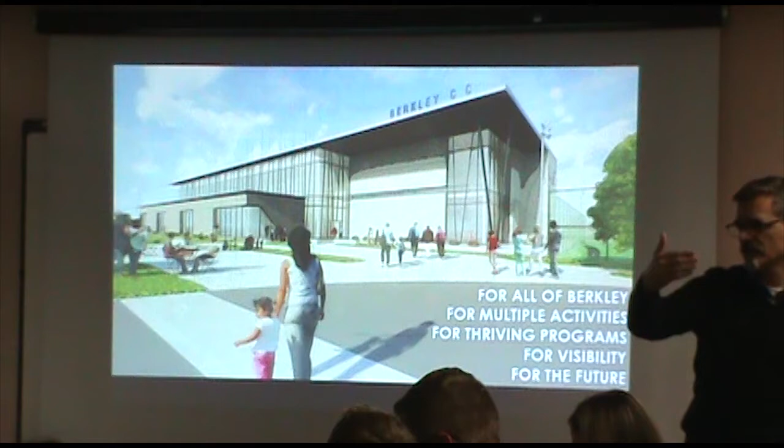And there's always a spot in these projects where I start to imagine the future building, and I've already done that here. Imagine that light coming from the building. The building will be just the other side of those tennis courts, and it will be visible from Catalpa.

Does everything include the landscaping, like the cost that you mentioned, the design and the plantings that you showed in some of the aerial views? Yes.

Including, we did put into here the cost of, as we understand what it's going to require right now, the cost to manage the stormwater from those parking lots. While that's limited to just this site, it will do its part to help minimize the impact on everybody else around it.

Yes? So I guess in that same vein, what opportunities have been contemplated for sustainable, green uses with this building, both interior and exterior? Stuff like rain gardens on top of that smaller step-down building, on the roof, or permeable parking lots or anything like that. What's been considered?

We've run through a number of those exact items. We talked about permeable paving. We talked about a planted roof. The planted roof cost, as it sits right now, pushes that number higher than we felt comfortable pushing it. It's not to say it's not possible, but right now that's not in the budget.